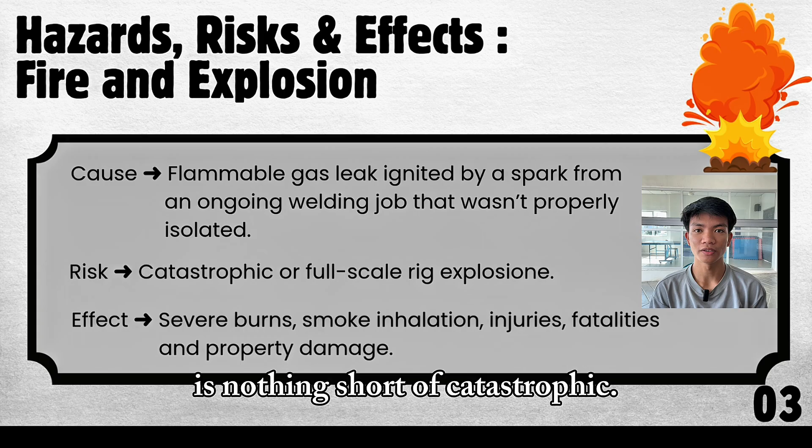To begin with, the primary cause we are examining here is flammable gases. If this gas comes into contact with a spark from an ongoing welding job, specifically one that wasn't properly isolated or managed under a strict working permit, we may cause the hazard to occur. The immediate risk following the ignition is nothing short of catastrophic. We are looking at a potential full-scale rig explosion, which can compromise the entire infrastructure within seconds.

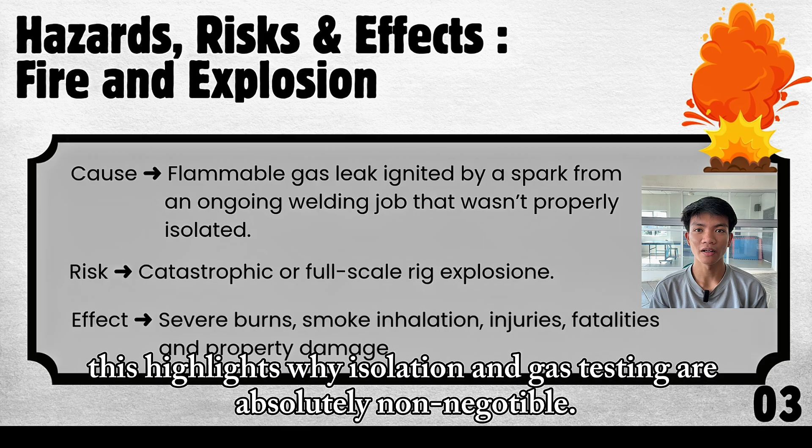The human and operational effects of such an event are devastating. It results in severe burns, smoke inhalation, serious injuries, and fatalities among the crew. This highlights why isolation and gas testing are absolutely non-negotiable.

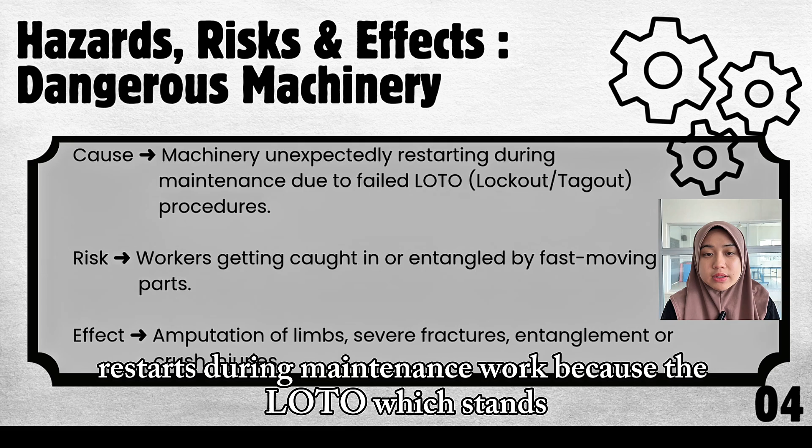Dangerous machinery. The cause of this hazard is when machinery unexpectedly restarts during maintenance work because the LOTO, which stands for Lockout or Tagout, procedure is not properly implemented. LOTO is important to ensure that all energy sources are isolated before maintenance begins.

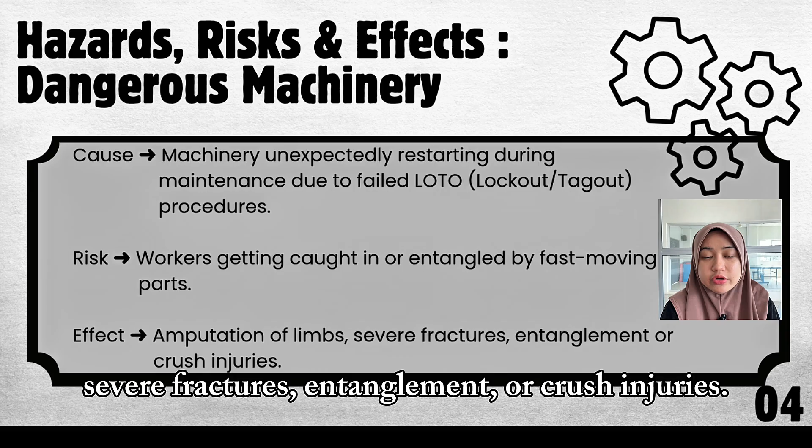The risk is that workers may get caught in or entangled with fast-moving machine parts if the machine suddenly starts operating. The effect can be very serious, including amputation of limbs, severe fractures, entanglement, or crush injuries. These injuries may result in permanent disability and can even be life-threatening.

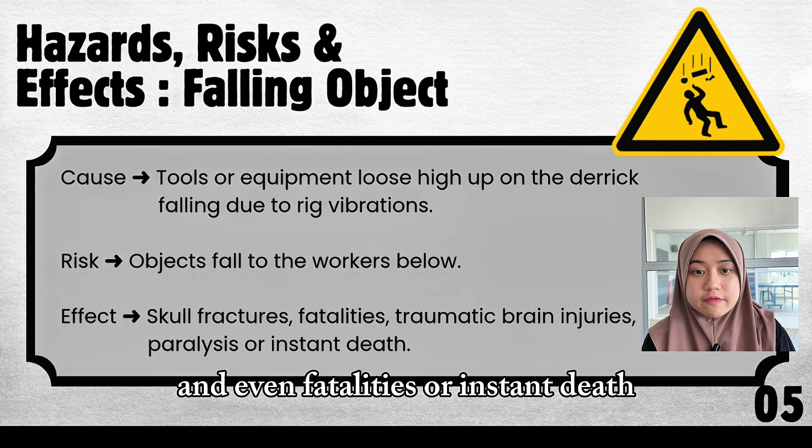Falling objects. The cause of this hazard is tools or equipment becoming loose at high locations on the derrick due to continuous vibration. When these items are not properly secured, they may fall from height. The risk is that the falling object can strike workers who are working below the derrick area. The effect can be extremely serious, including skull fracture, traumatic brain injuries, paralysis, and even fatalities or instant death, depending on the size and weight of the falling object.

Let's talk about a major safety issue we all face: fatigue. It's not just about being tired, it's a dangerous chain reaction that we can break down into 3 steps: the cause. It all starts with extreme work schedules. We are talking about working 12-hour shifts for 28 days straight. On top of that, not getting proper sleep.

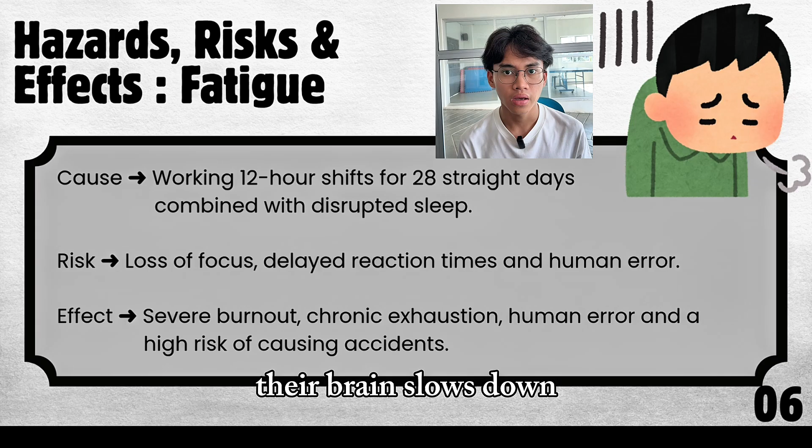Secondly, the risk. When you push a person too hard, their brain slows down, they lose focus, their reaction times drop, and they start making mistakes. The effect is, if we don't fix it, it leads to severe burnout and chronic exhaustion. At that point, the risk of a serious job accident skyrockets.

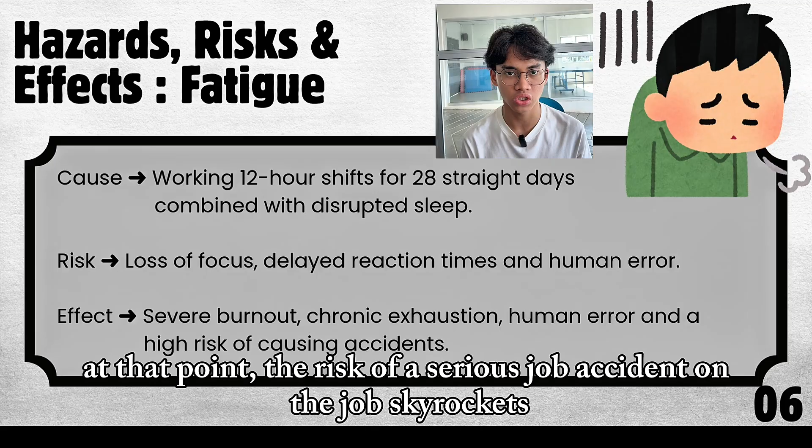Let's talk about a hazard that is less visual, but equally damaging over time, which is noise exposure. The root cause is in daily operations. Our crew frequently work near heavy machinery, such as loud generators, drilling machines, or compressors operating at intensities greater than 90 decibels, while failing to use proper ear protection.

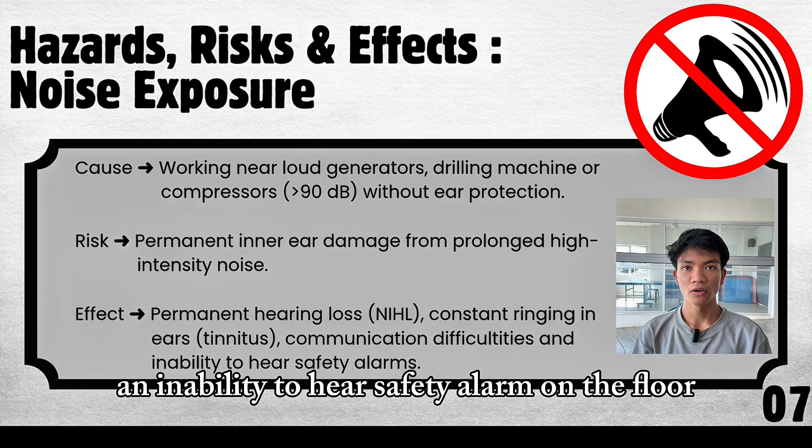Because noise damage accumulates quietly, the underlying risk is permanent inner ear damage. Prolonged exposure to high-intensity noise permanently destroys the delicate hair cells in the cochlea, which cannot be regenerated. Consequently, the effect drastically impacts a worker's quality of life and safety. It leads to noise-induced hearing loss, NIHL, and tinnitus, which is a constant, exhausting ringing in the ears. Operationally, it causes severe communication difficulties, and most dangerously, an inability to hear safety alarms on the floor, compounding the risk of other workplace incidents.

There are actually ways to control all these hazards. First of all, fire and explosion. To keep things safe, we use gas detection systems, install blowout preventers (BOP), and make sure everyone knows the emergency response plan. Secondly, dangerous machinery. We protect workers by putting safety guards on machines, using lockout or tagout rules during repairs so machines don't accidentally turn on, and providing regular safety training.

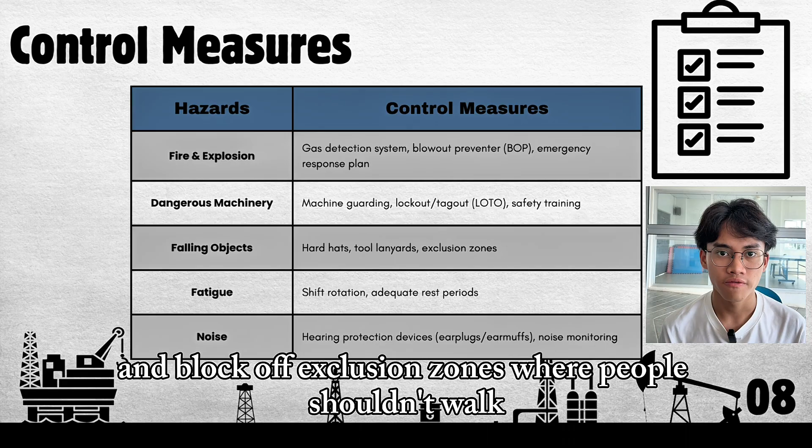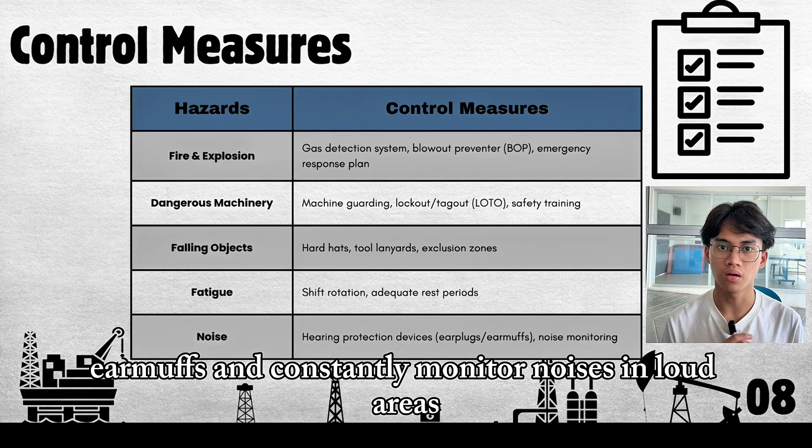Third, falling objects. To protect anyone walking below, we require hard hats, make sure tools are tethered with lanyards, and block off exclusion zones where people should not walk. Fourth, fatigue. Going back to our last slide, we fight fatigue by fixing the schedule, using proper shift rotation, and making sure everyone gets enough rest time between shifts. Finally, noise. To protect everyone's hearing, we hand out earplugs, ear muffs, and constantly monitor noise levels in loud areas. If we keep an eye on these hazards and use these fixes, we can keep the workplace safe for everyone.

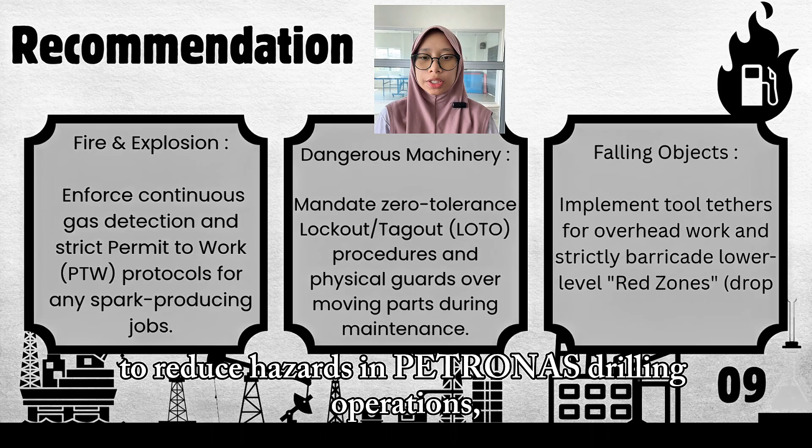To reduce hazards in Petronas drilling operations, several safety measures must be applied. First, for fire and explosion risk, continuous gas detection and strict permit-to-work procedures are essential, especially for spark-producing tasks. Next, for machinery hazards, lockout and tagout procedures must be enforced during maintenance, along with proper machine guarding.

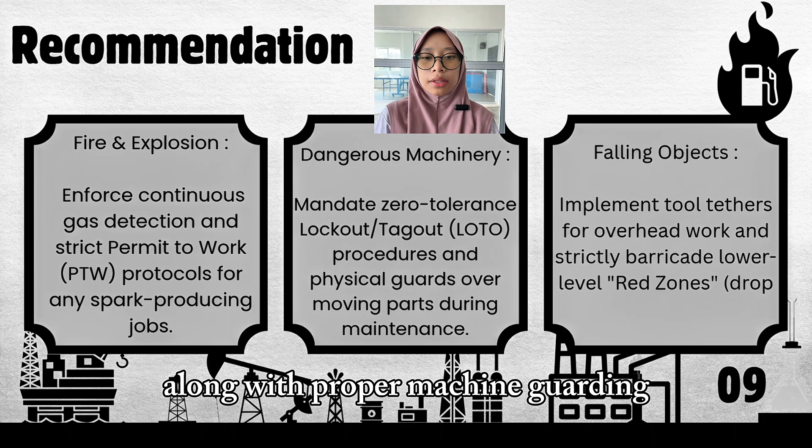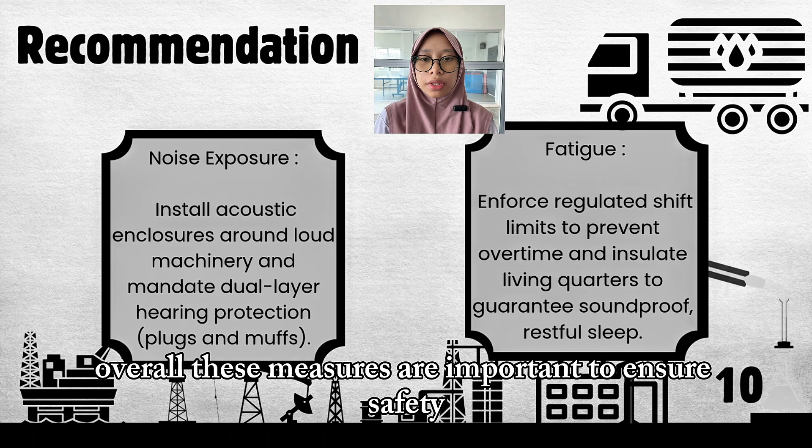To prevent injuries from falling objects, workers should use tool tethers and avoid clearly marked exclusion zones. In terms of noise exposure, acoustic enclosures should be installed and workers must wear hearing protection such as earplugs and ear muffs. Lastly, fatigue must be managed by limiting working hours and ensuring proper rest in quiet living quarters. Overall, these measures are important to ensure safety and prevent accidents in oil drilling operations.

In conclusion, offshore oil drilling is a high-risk environment that exposes workers to serious dangers, from fire and explosion to long-term health effects like hearing loss. Human factors such as fatigue and errors can further increase this risk, making proper rest and awareness very important.

To reduce this danger, strict safety procedures, proper equipment, and the use of protective gear must always be followed. Most importantly, a strong safety culture is essential, where every worker is trained, alert, and confident to stop work when a hazard is identified. Overall, safety is not just a rule, but a shared responsibility to ensure everyone returns home safely.